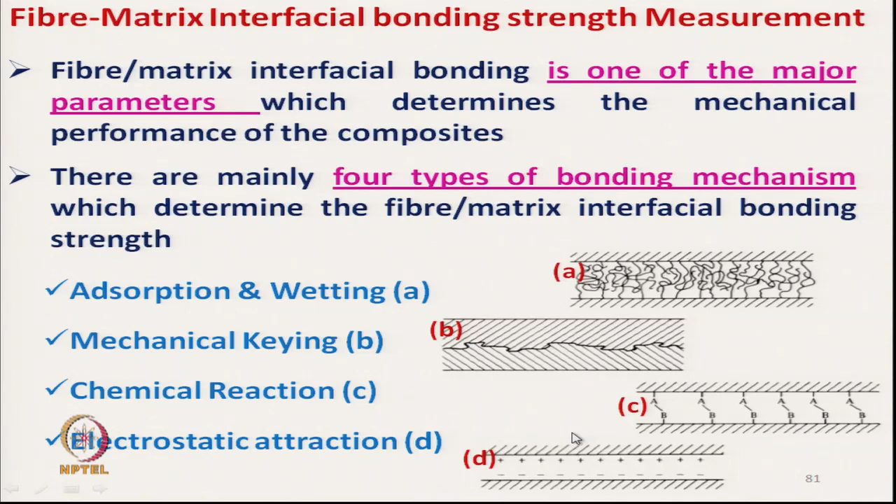Third one is the chemical reaction between the fiber and interface material, and interface and matrix material. Fourth one is electrostatic attraction. If we can create the electrostatic attraction between the reinforcing material and the matrix material, we can create the bonding strength.

The measurement of bond strength is done using 4 different techniques, particularly for fiber reinforced polymers. These are single fiber pull out test, single fiber push out test, fiber push down test, and full fragmentation test.

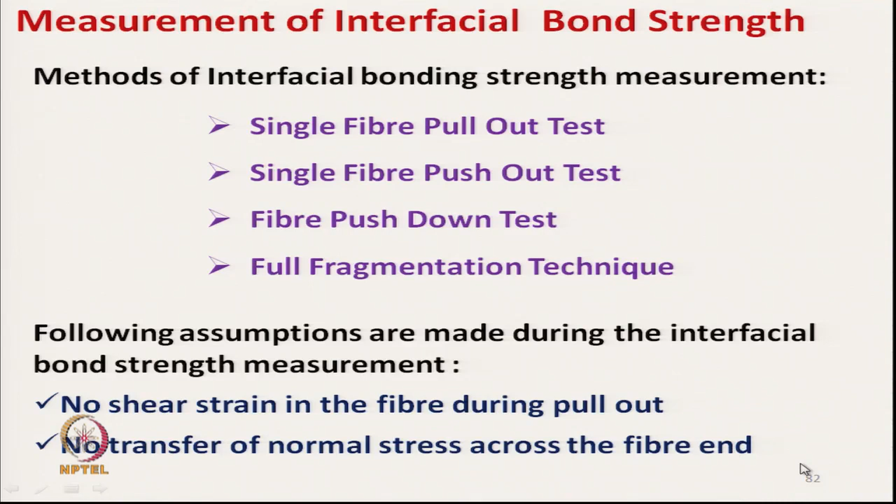The assumptions during the interface bond strength measurement are that there is no shear strain in the fiber during pull out. So once we try to pull out the fiber, there will not be any shear strain in the fiber, and no transfer of normal stress across the fiber end. With these assumptions we can test the bond strength.

The single fiber pull out test involves pulling a single fiber end which is partially embedded, a single reinforcing particle, out of the block of matrix material.

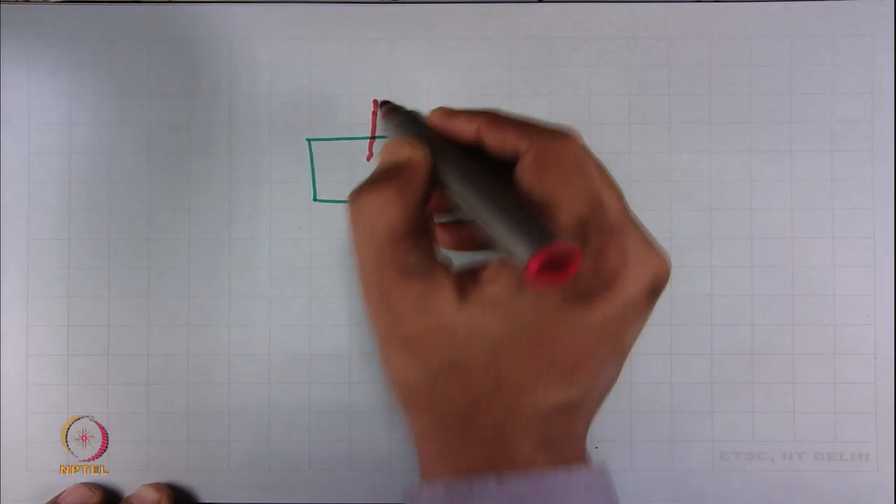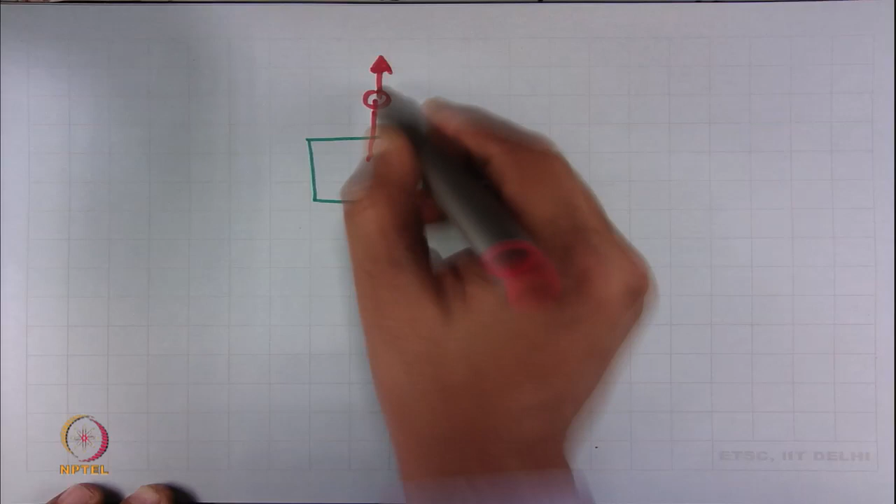So a matrix material block is created, and the single fiber which is partially coming out from the matrix. This is only a single fiber, and if we test, if we pull the fiber and once the fiber is coming out of this matrix from the composite material, this force is measured.

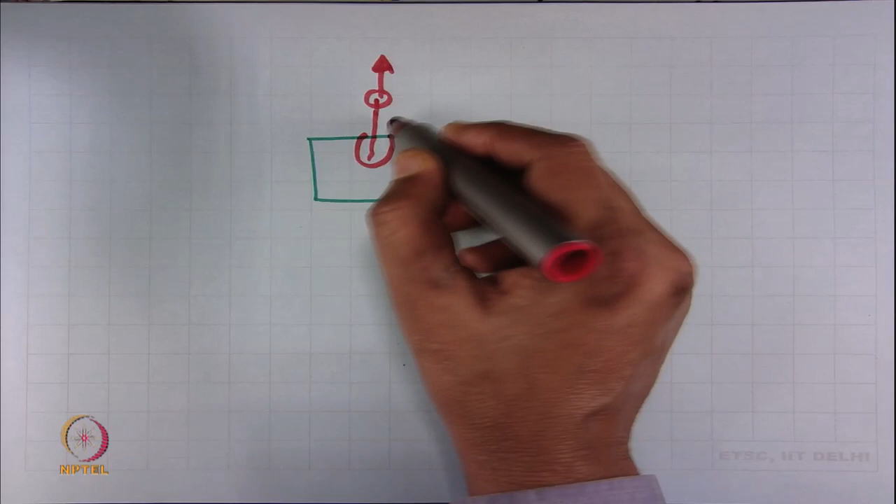That means if the fiber breaks before it comes out, then the test method will not complete. So partially embedded single reinforcing particles, like here the particle is fiber, out of the block of matrix material, this portion. Pull out leads to debonding.

First, debonding is taking place, then propagation of the debonding front will occur, then once debonding and propagation is completed, frictional sliding will be there. This test is applicable when the strength of the reinforcing material is very high, higher than the bonding strength.

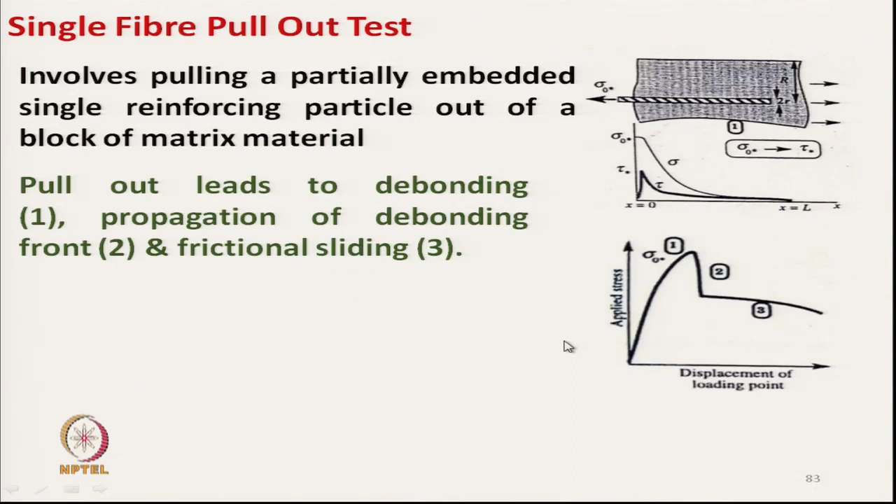The drawbacks are that the interfaces in the specimen may differ from those in real material, because here in the specimen, which is created using a single fiber, the interfaces created may be entirely different from the actual composite material, due to the absence of neighboring fibers. Here there are no neighboring fibers, but in composite material we have other fibers which interfere with the pulling out force.

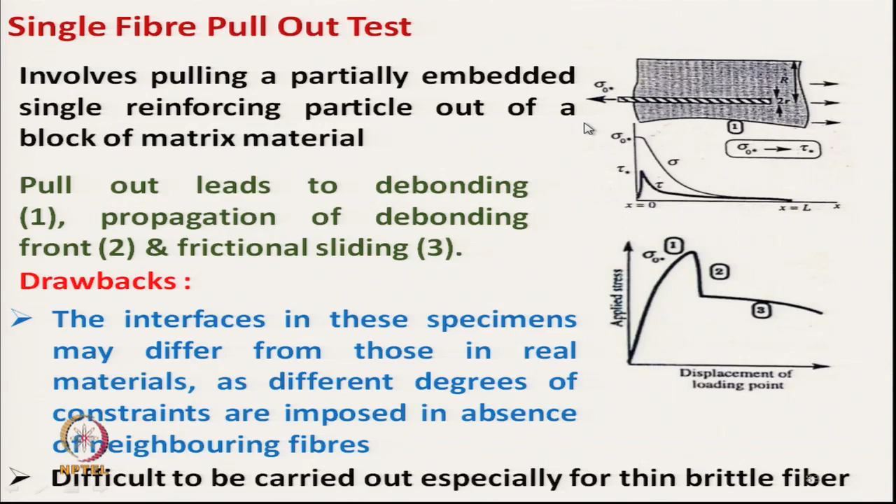It is also difficult to carry out, especially for thin and brittle fiber. For very thin fiber the strength will be less, so for those fibers it is very difficult to carry out, and also for brittle fiber the fiber may break before we start the test.

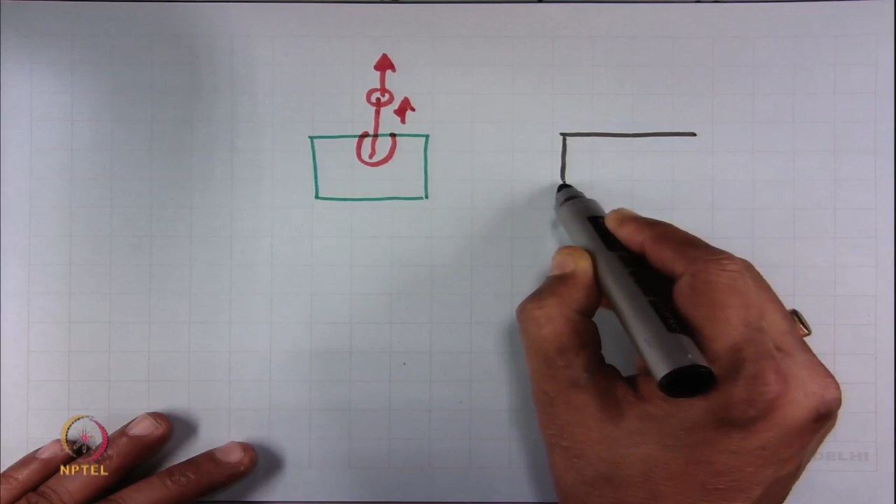Next method is single fiber push out test. Here the method is, this is a composite, and we use a single fiber here, and the fiber should be thick enough.

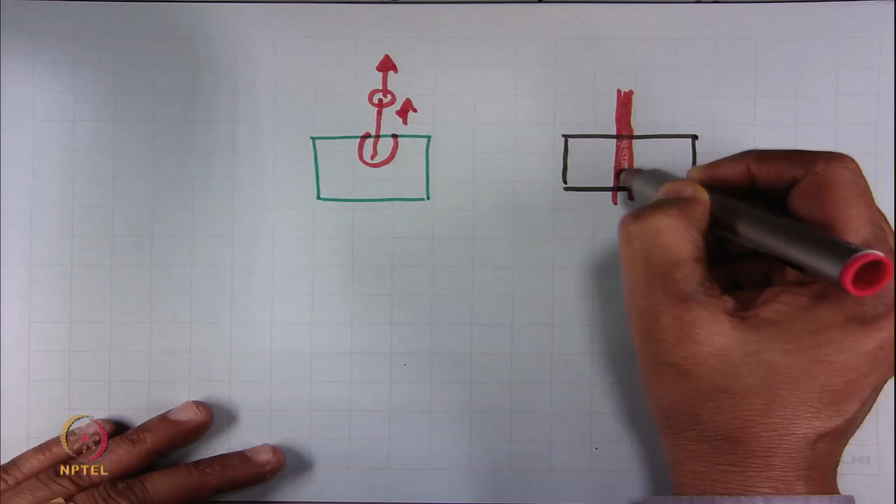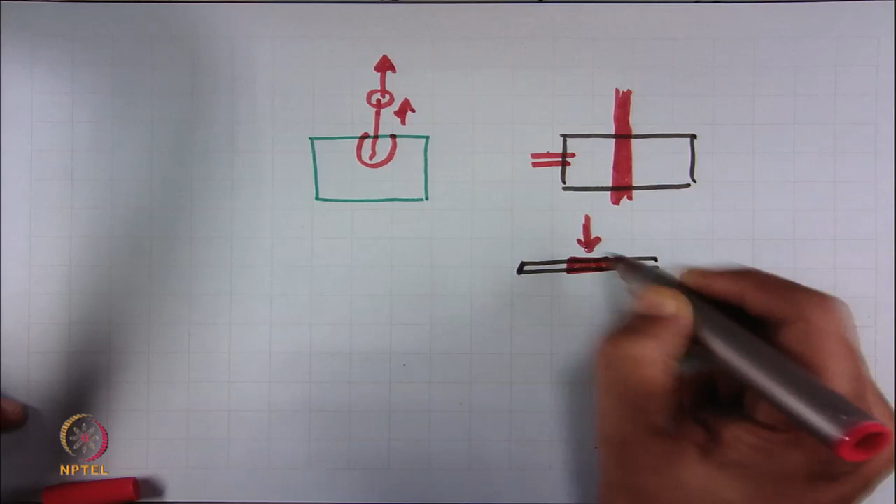After this, the composite slice is made. This is a composite slice, a very thin slice of composite, and here we have a single fiber. In this case, the single fiber is pushed out by applying some force, the fiber will be pushed out, and this force is being measured.

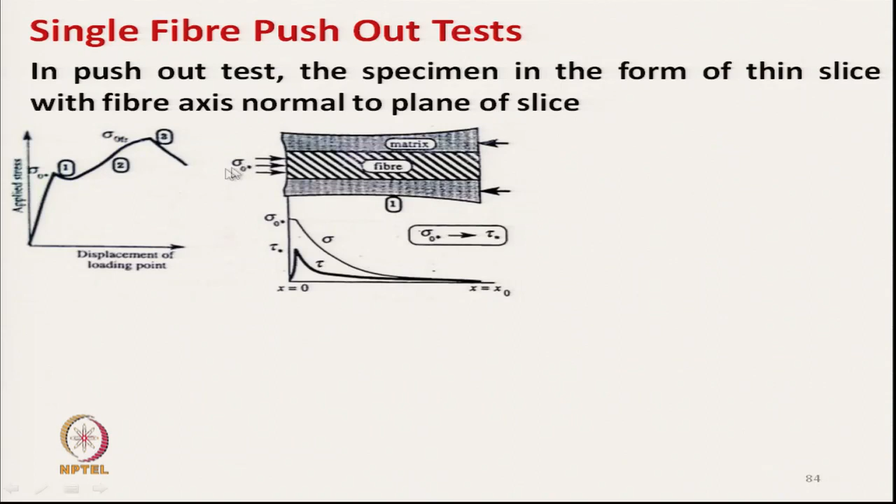That is, in the push out test, the specimen is in the form of a thin slice with the fiber axis normal to the plane of the slice. So this is the plane here, and this is a single fiber, and this is the slice thickness, and the fiber is being pushed out of this place.

The fiber becomes displaced, so that it protrudes from the bottom of the specimen, from the other side it will come out. This test is easy with large diameter fiber, but for fine fibers it is difficult. So the thickness of the fiber should be sufficient, otherwise it is very difficult to push out. This again shows debonding, propagation, and frictional slide.

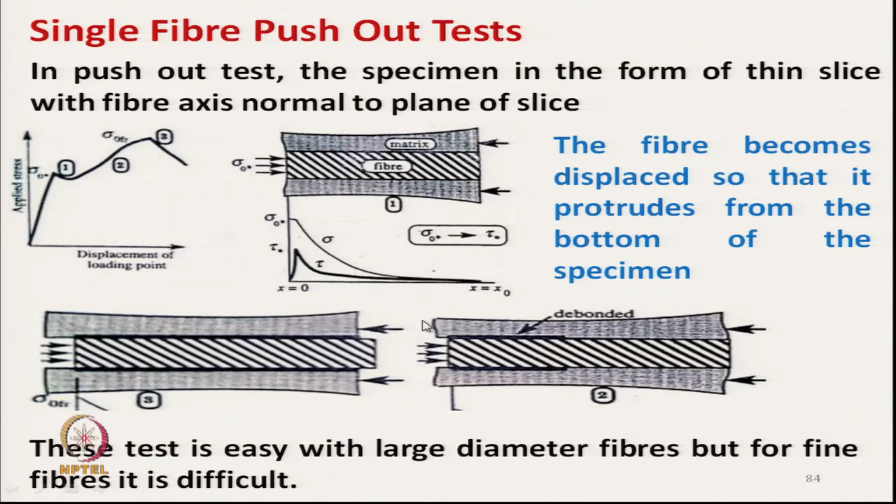Third method is the fiber push down test. Here it is not a single fiber, but a bulk fiber. In the push down test, the specimen is in bulk form, and debonding is followed by the fiber frictionally sliding down over a certain distance, from which we can calculate the debonding force. This leaves a permanent displacement between the top of the fiber and the top of the matrix when the applied load is removed, so there will be permanent deformation.

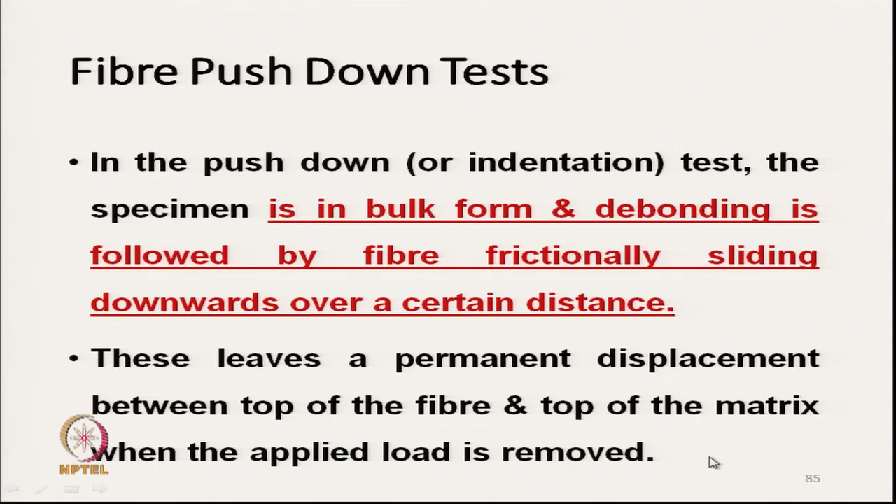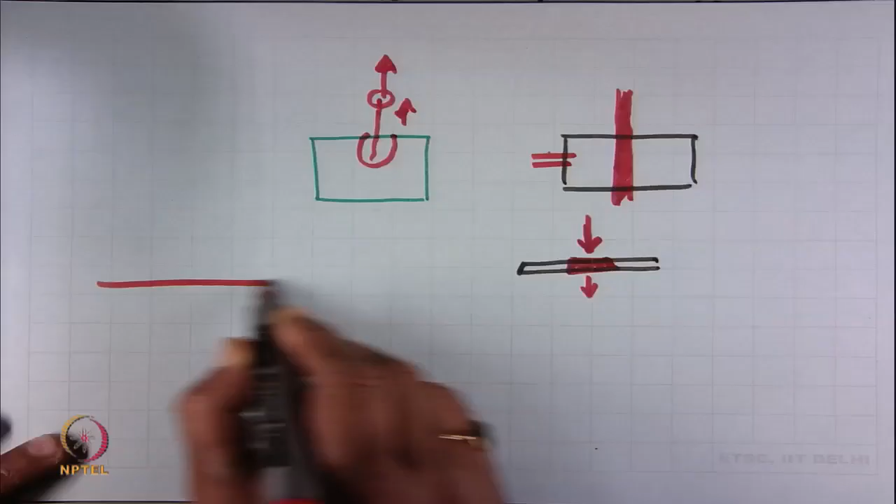The next technique is the fiber fragmentation technique. This method is used for metal matrix composites and some polymer matrix composites also. This method involves embedding a single fiber in matrix and straining the matrix in tension parallel to the fiber. Here we have the matrix, and here we have the fiber material.

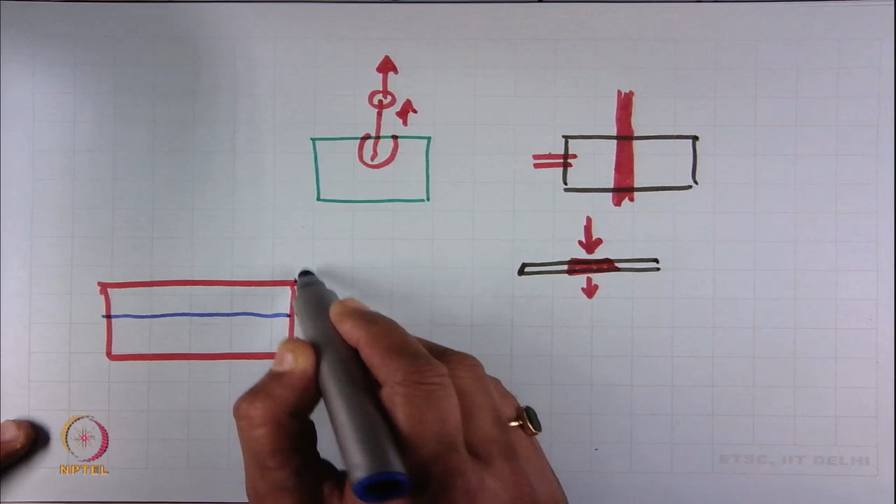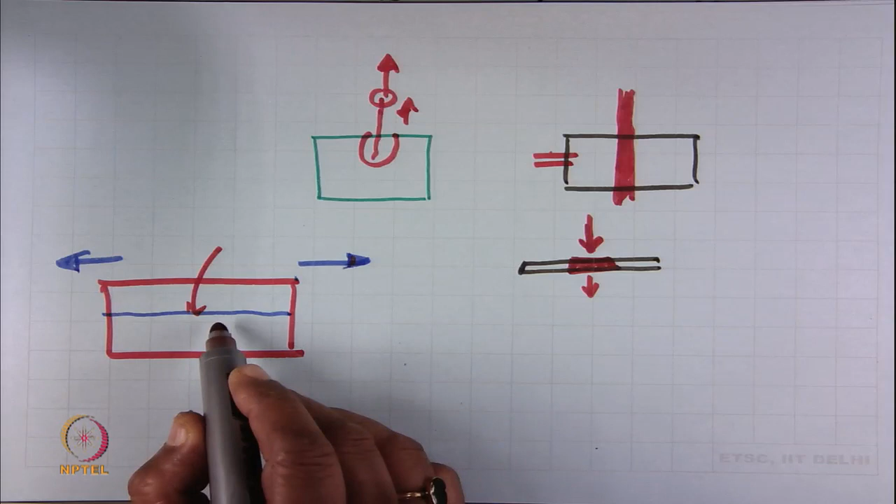Now this matrix is being strained, and in case the extensibility of the matrix is higher than the reinforcing material, there will be fragmentation of the reinforcing material. This matrix is being strained to this dimension, and the reinforcing material has got fragmented. By studying the fragmentation and the aspect ratio, we can calculate the debonding force.

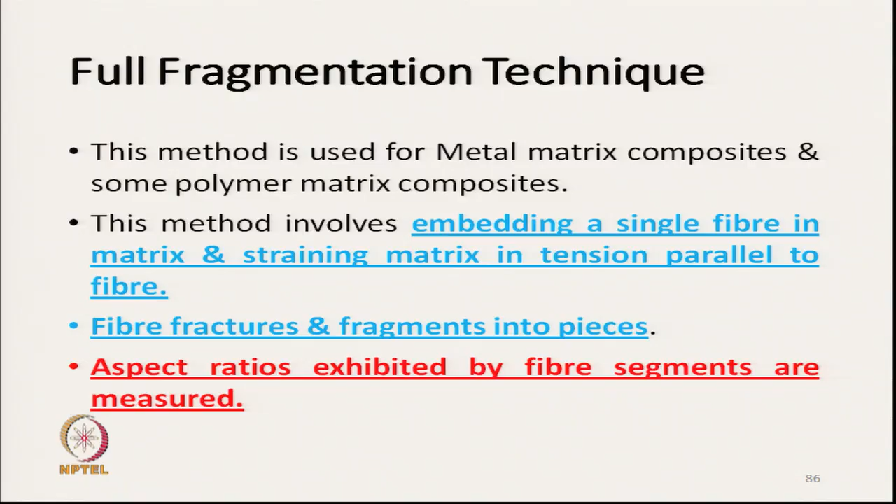So by applying the tension parallel to the fiber, it fractures and fragments into pieces at different points, and the aspect ratio exhibited by fiber segments is measured. So these are the methods for measurement of debonding force.

The next important characteristic of any composite material is void content, because the amount of void content in the composite material affects its mechanical characteristics significantly. Voids are entrapped air in the composite, it may be entrapped air or any volatile material. Presence of void can drastically reduce the mechanical properties of composite materials.

During composite manufacturing, voids are eliminated by a process of consolidation which involves application of heat and pressure. So the void content of a composite sample can be calculated using a formula involving theoretical density and experimental density, where sigma T is the theoretical density and sigma E is the experimental density. Using this formula, we calculate void content as sigma T minus sigma E, divided by sigma T.

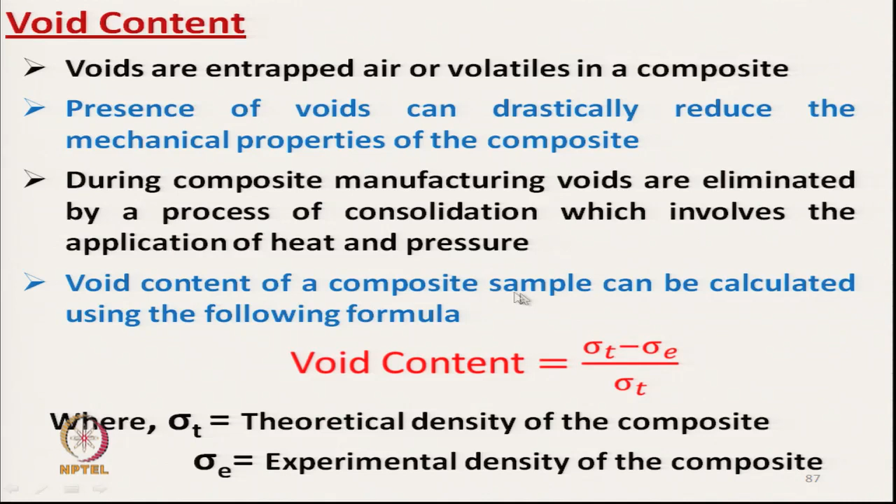The experimental density can be calculated by taking the mass of the composite in air and the same specimen in water. This method can be used only if the density of the composite is more than that of water, that is more than 1. If that is the case, then we can use this technique.

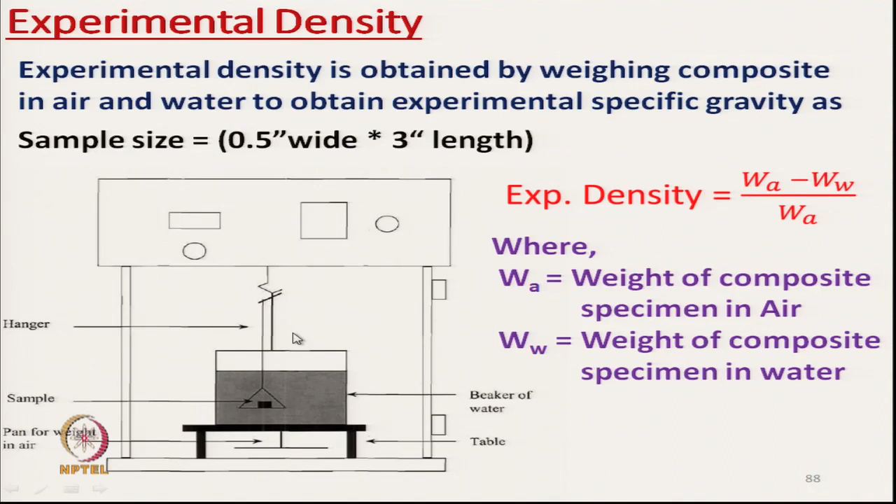The experimental density is given by W A minus W W by W A, where W A is the weight of the composite specimen in air and W W is the weight of the composite specimen in water. So here we measure the weight in water as well as in air, and the theoretical density we calculate by knowing the fiber volume fraction.

V f is the fiber volume fraction, sigma m is the density of the matrix, and this is the density of fiber. Using this formula we can calculate the theoretical density of the composite material, and the fiber volume fraction in the composite can be measured as follows.

We also have to measure the actual fiber volume fraction, V f. It is done by using image analysis technique, matrix burn off technique, or liquid digestion technique. So the matrix can be removed by using the burn off method or the liquid digestion method.

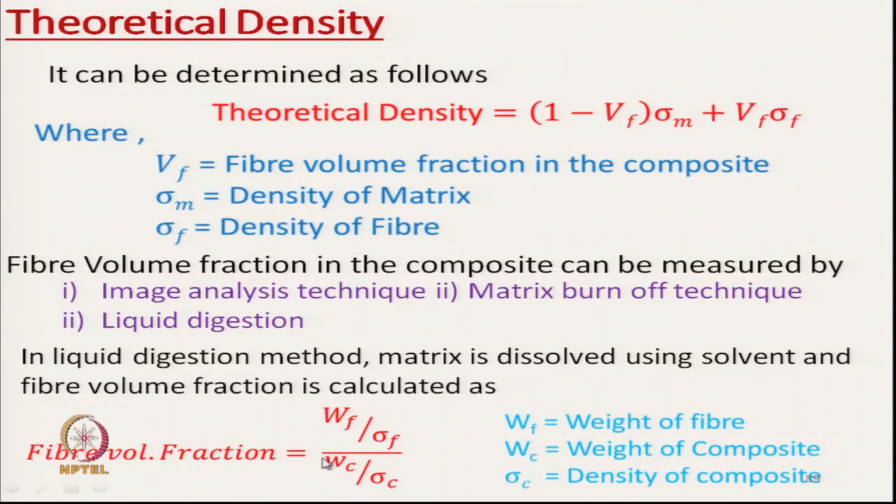So we can get the actual volume of fiber, and the fiber volume fraction is W f by sigma f, that is the mass of fiber divided by density of fiber, giving the volume of fiber, divided by the volume of the composite material. So it is the total volume of fibrous material divided by the total volume of composite material.

After measuring the void content, the next important characteristic is dynamic mechanical analysis. This is important for composites because during application they are subject to various dynamic mechanical loads at different temperatures and conditions. DMA is used to study the viscoelastic behavior and glass transition temperature of the polymer. Most fiber reinforced polymers are viscoelastic in nature, and this behavior is assessed using the DMA method. There are several types of DMA used with composites, including torsion pendulum analysis and other resonant techniques.

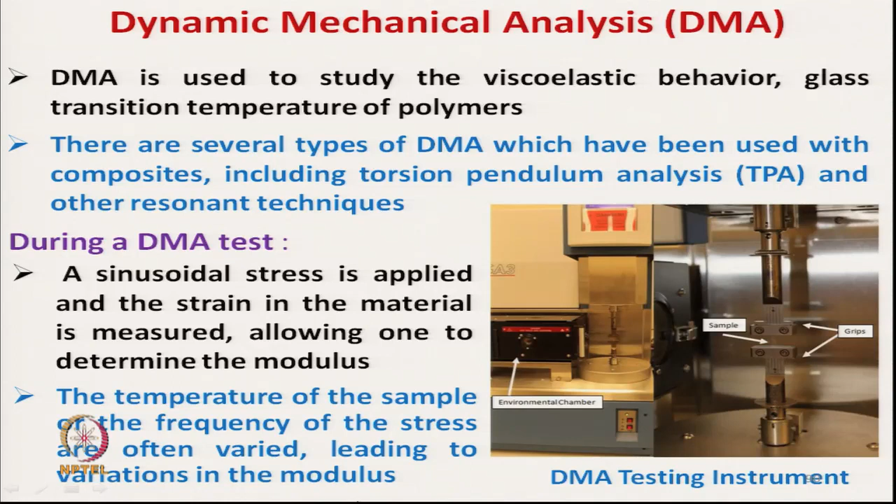During a dynamic mechanical analysis test, a sinusoidal stress is applied. Here is the grip, and in between the grip there will be a specimen. Sinusoidal stress is applied, and the strain in the material is measured, allowing one to determine the modulus. The temperature of the specimen or the frequency of the test is changed, leading to variation in modulus. So we change the temperature and frequency of stress and measure the change in modulus. The test is carried out for storage modulus and loss modulus.

DMA measures stiffness, which is the in-phase component, that is storage modulus. Stiffness is the elastic component, and damping is the viscous component. By this method we can measure stiffness and damping, and these are reported as modulus and tan delta.

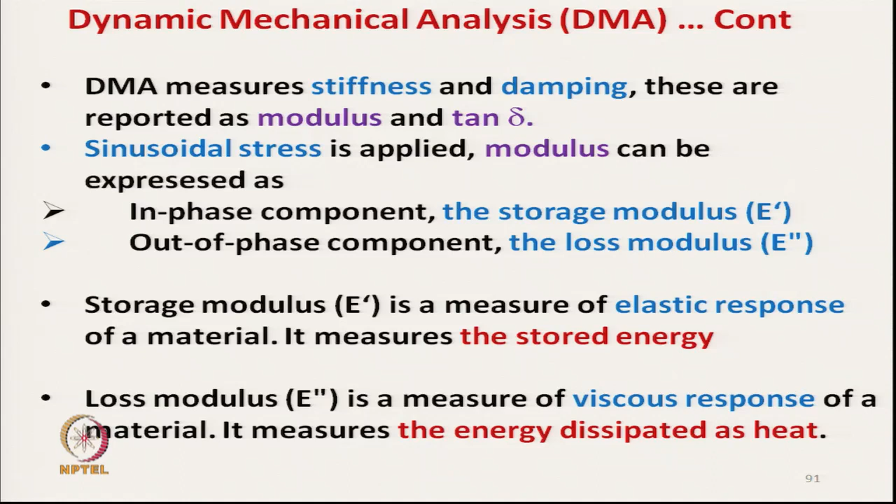The sinusoidal stress is applied, and modulus can be expressed in terms of the in-phase component, that is storage modulus E dash, and the out-of-phase component, which is loss modulus E double dash. The storage modulus is a measure of elastic response of the material, measuring the stored energy. The loss modulus measures the dissipated heat during testing, which is the viscous response of the material. Tan delta is the ratio of loss to storage, and is called the damping. So if we take the ratio of loss modulus and storage modulus, we get the damping value, a measure of energy dissipated by the material.

Tan delta can be used to characterize the modulus of the material, and it is expressed as E double dash by E dash, where E double dash is loss modulus and E dash is storage modulus. Delta should range between 0 to 90 degrees. As delta approaches 0, it approaches pure elastic behavior, where E double dash tends to 0, meaning this part becomes 0, so tan delta becomes 0.

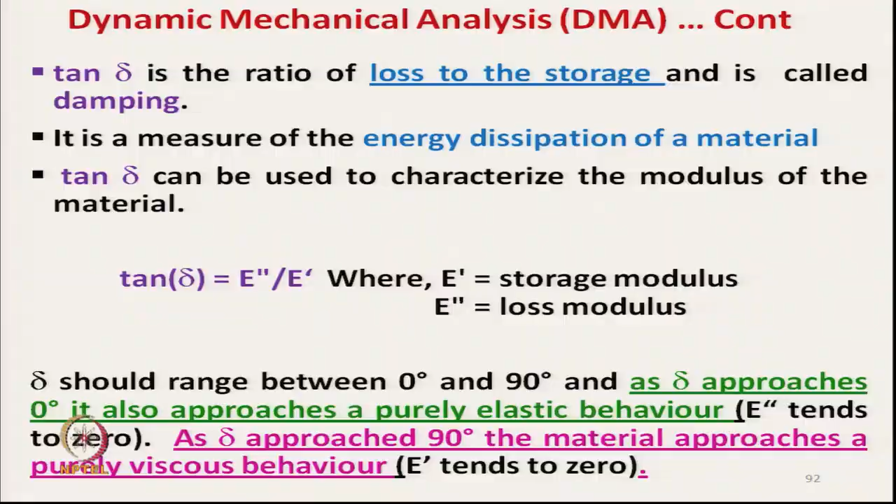That shows pure elastic behavior, and as delta approaches 90 degrees, it approaches pure viscous behavior. So from the tan delta value we can get an idea about the material behavior, whether it is a pure elastic material or a pure viscous material. For thermoplastic composites, if we increase the temperature, it will gradually transition from elastic behavior to viscous behavior.

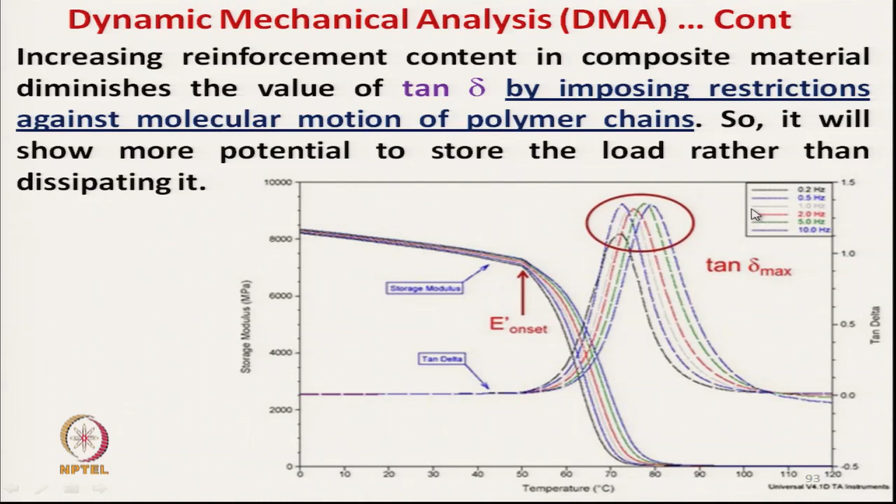By imposing the restriction, once we add the reinforcing material and increase its content, it restricts the molecular motion of the polymer chain, showing more potential to store the load rather than dissipating it. This allows the composite material to store the load.

Otherwise, in absence of reinforcing material, it will try to lose all this load value. Now, after all these tests which we have discussed, those are destructive in nature. That means we test the composite which will not be reused, but in most applications the composite materials are applied in structural material. If we want to use test methods which are destructive in nature, we cannot use them for any structural material.

But during the applications of all this composite in different structures, if we want to use it, we have to select some non-destructive test of composite materials. So there are different non-destructive methods which will actually help us to understand the characteristics of composite materials.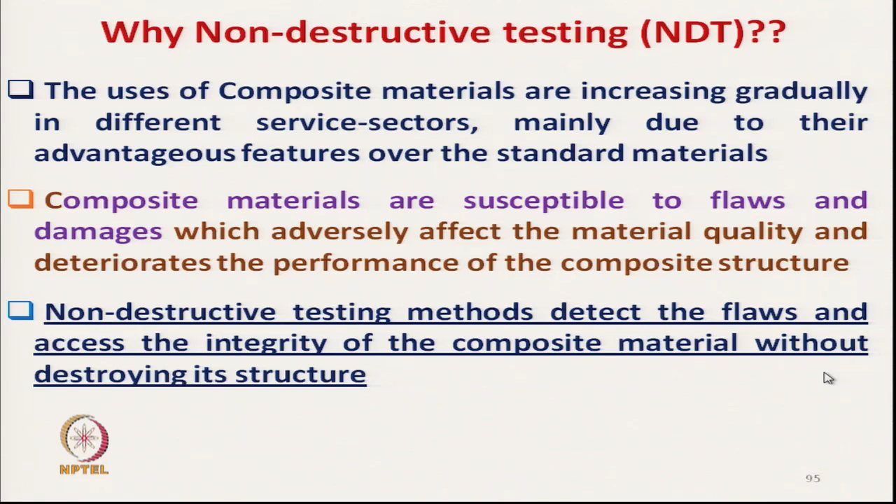Non-destructive testing methods detect the flaws and assess the integrity of the composite material without destroying the structure, which is extremely important. So we have to assess the integrity of the material or structure without destroying it. We can intermittently test the performance of the structure by non-destructive methods, and it minimizes the risk factors during service life of a composite material.

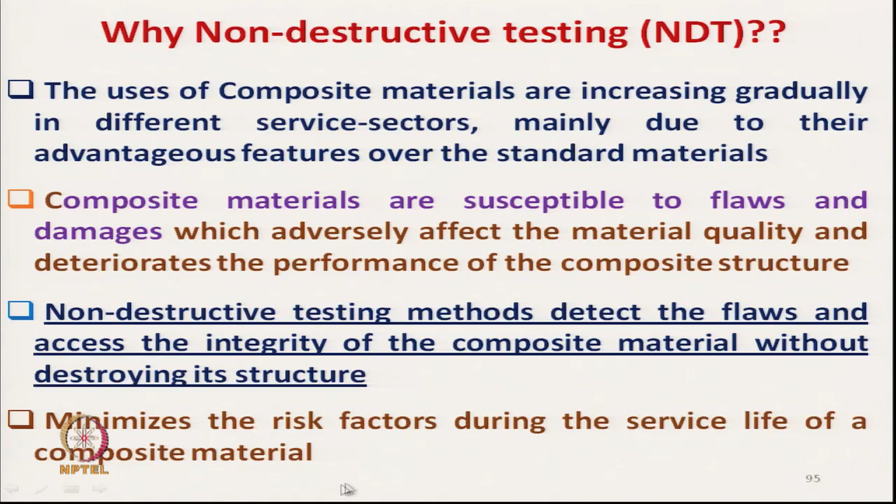So, during its service, like an aircraft structure or aircraft body, if we want to test whether there is any crack or any failure, we can use non-destructive test methods on the total structure. Here we cannot use the destructive test method.

So, the driving force is the safety norms. There are different safety norms. Suppose a particular structure, we have to understand whether any internal damage took place or not in the structure which is already built. There is a norm: we have to test and understand the characteristics of the material during test. So, due to the safety norms we have to test the material, but if it is destructive in nature we cannot test it. So, non-destructive testing is required.

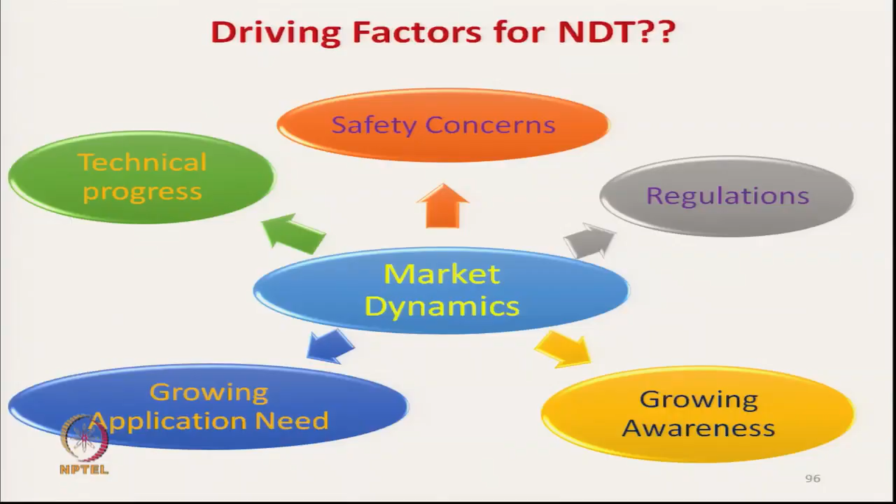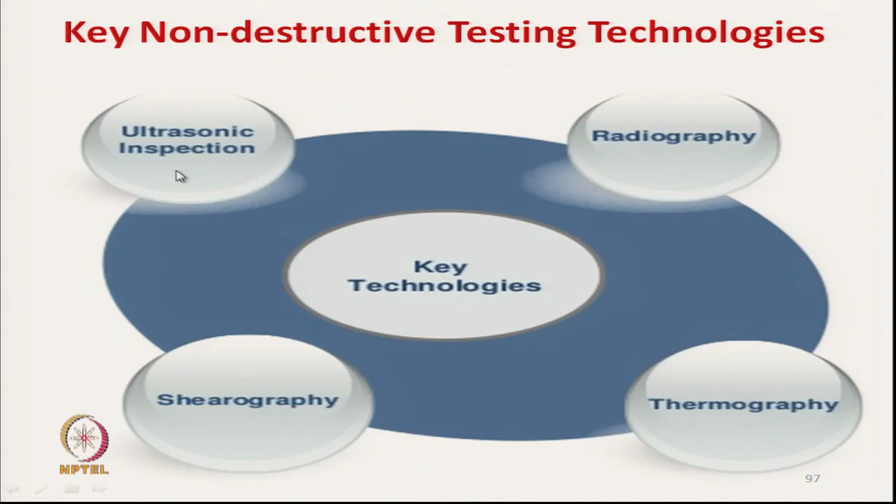Different test technologies are there. The main technologies are radiography, thermography, shearography, and ultrasonic inspection. In ultrasonic inspection, we use ultrasonic sound waves to assess the characteristics. I will discuss all these methods one by one.

First is ultrasonic inspection. This method works based on the propagation of ultrasonic waves, ranging from 0.1 to 50 megahertz, through the material tested. So the ultrasonic wave is propagated through the material. During testing, the sample is immersed in some liquid to separate the transducer and the test object.

The transducer generates the ultrasound, and the test specimen should be separated using some liquid applied on the surface of the test material. The transducer which generates the ultrasound is connected to a diagnostic machine and is passed over the object during the test.

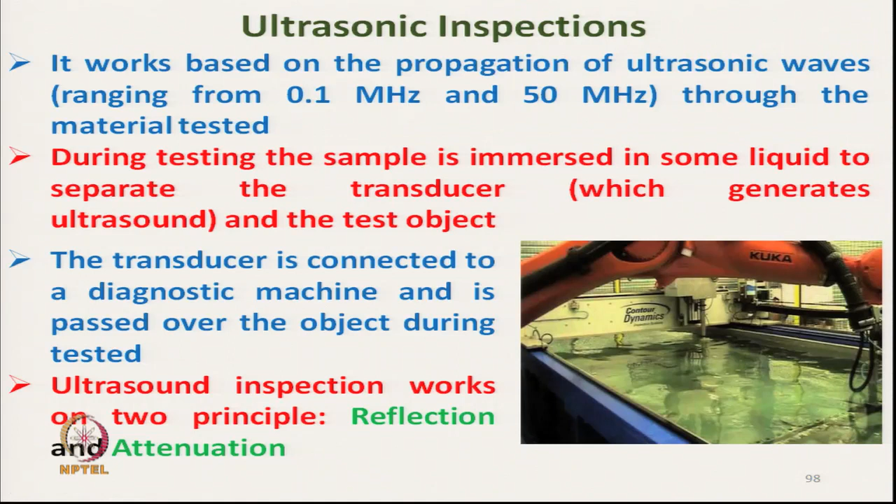The ultrasound inspection works on two principles: reflection mode and attenuation mode. In reflection mode, the ultrasound falls on the material, and due to the presence of some defects, it gets reflected, and that reflection is measured. In attenuation mode, the ultrasound is passed through the material, and the recording is taken from the other side.

Once it is working in reflection mode, the transducer performs both the sending and receiving of the ultrasound pulse wave. So there is the transducer - this sensor is sending the ultrasound and receiving the ultrasound, and the time here it is measuring the peaks.

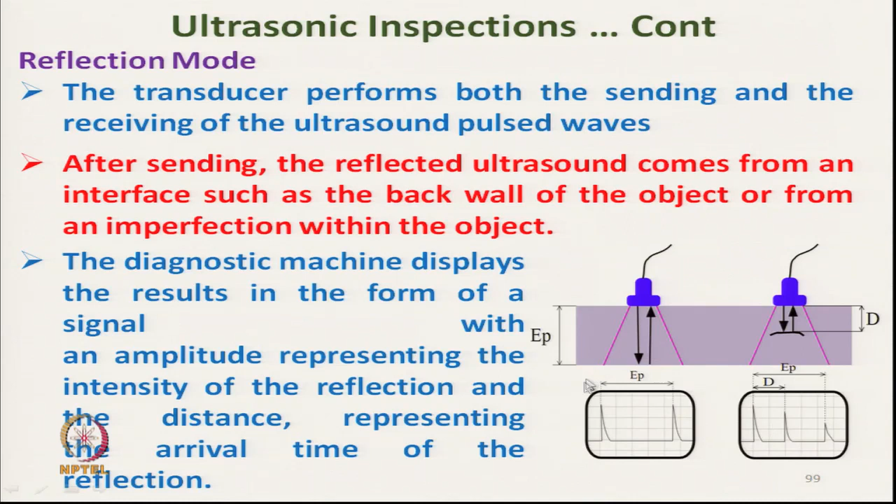Once the ultrasound system works on attenuation mode, a transmitter sends the ultrasound through one surface, and there will be a separate receiver which will detect the amount of wave that reaches the other surface. Depending on the defect present in the structure, the amount of wave transmitting through the composite will change. The imperfections reduce the amount of ultrasound transmitted, thus revealing their presence.

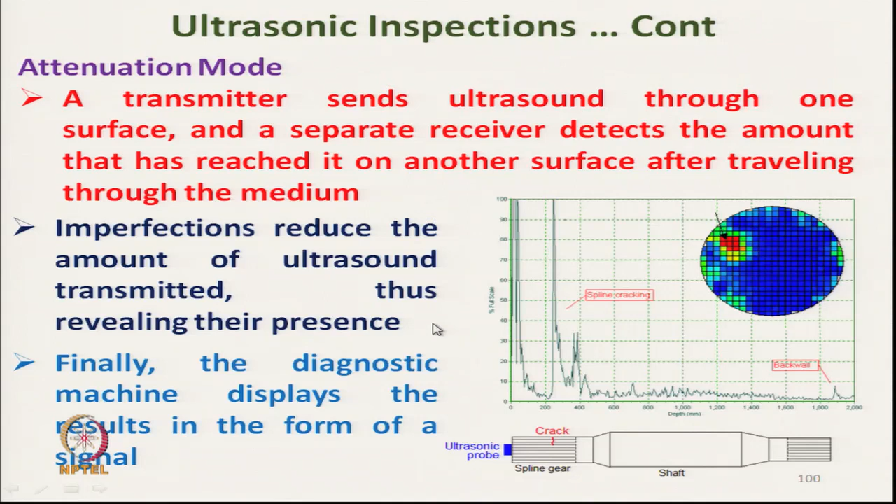So any defect present inside the structure can be identified. Finally, the diagnostic machine displays the results in the form of a signal. So it works on reflection mode and attenuation mode.

The advantages of ultrasound: the ultrasonic inspection principle is that it is capable of detecting very small flaws from deep within the sample. So in case there is a very small crack inside the composite material, it can detect it with greater accuracy than other non-destructive methods, and is capable of estimating the size, orientation, shape and nature of the defect. So for any sorts of defect, whether it is a void or crack or something else, it can detect it.

Non-hazardous, because only ultrasound is created, so it does not affect the human body, the operator, or nearby personnel, and has no effect on equipment and material in the vicinity.

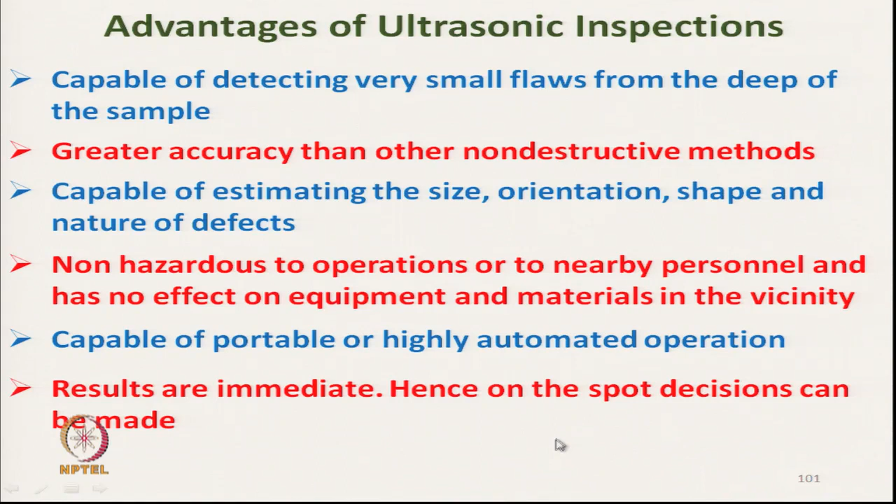Capable of portable or highly automated operation, so the total instrument can be taken to the structure and tested. Results are immediate, we can get the result immediately, hence on-the-spot decisions can be taken.

Main disadvantages of ultrasonic inspection are: it is expensive, and extensive technical knowledge is required for development of the inspection process, so it becomes expensive. Thin, rough, irregular shaped samples are difficult to inspect. This is because we need some liquid applied on the surface, and if the surface is rough, application of the liquid becomes difficult.

Surface must be prepared by cleaning and removing loose scales and paints. So once we try to apply this technique on an existing big structure where it is painted or something is on the surface, it is very difficult to use.

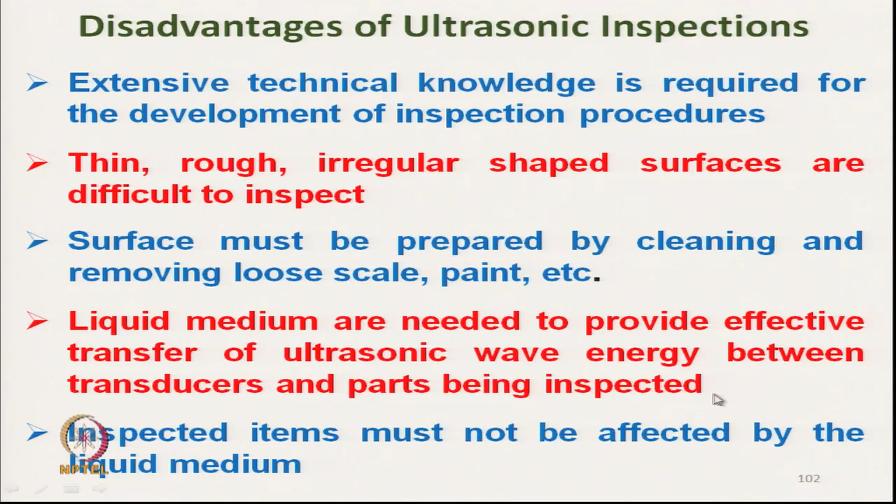Liquid medium is needed to provide effective transfer of ultrasonic wave energy between the transducer and the parts being inspected, and that is a disadvantage. It is very difficult to apply the liquid medium in some applications, such as when vertically oriented or curved, where it becomes difficult.

Inspected items must not be affected by the liquid medium. So the liquid medium we use should not get affected, and it should not affect the item, the composite material. This liquid should not react with the matrix or the reinforcing material.

Next technique is thermographic inspection technique. In this technique, the thermographic inspection of an object works through imaging of the thermal pattern at the object's surface, so from the other surface of the material we can get the thermal image.

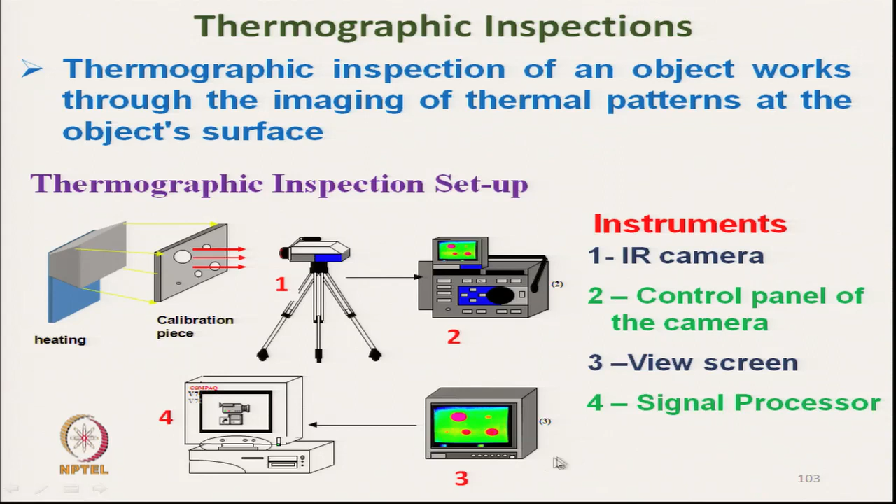So here it consists of an IR camera which takes the image, control panel of the camera, the control panel where we can control the camera, view screen, and signal processor. These are the components. The defects encountered here are lack of adhesion, cohesion, or bubbles.

So this type of defect, bubble present or lack of adhesion, we can measure using thermographic inspection. Delamination we can measure, defects on surface coating,

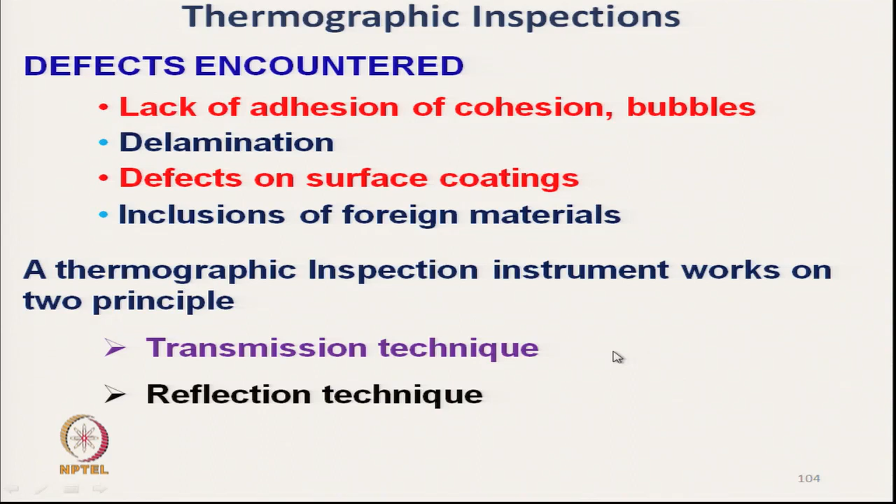inclusion of foreign material in the composite material we can get by using thermographic inspection. A thermographic inspection instrument works on two principles: one is transmission technique, another is reflection technique.

This is the technique for transmission mode, where heat is applied, and once the heat is applied, it will be transmitted evenly throughout the sample. The sample on the left side shows the sample without any defect. Once heat is applied from the heat source to the sample with defect, here due to the presence of a defect like a crack or any other thing,

the heat transmitted on the other side will be non-uniform, and by using the thermal imaging camera we can image the temperature distribution on the other side. This is showing the image on the other side, and this shows the defect present in the composite.

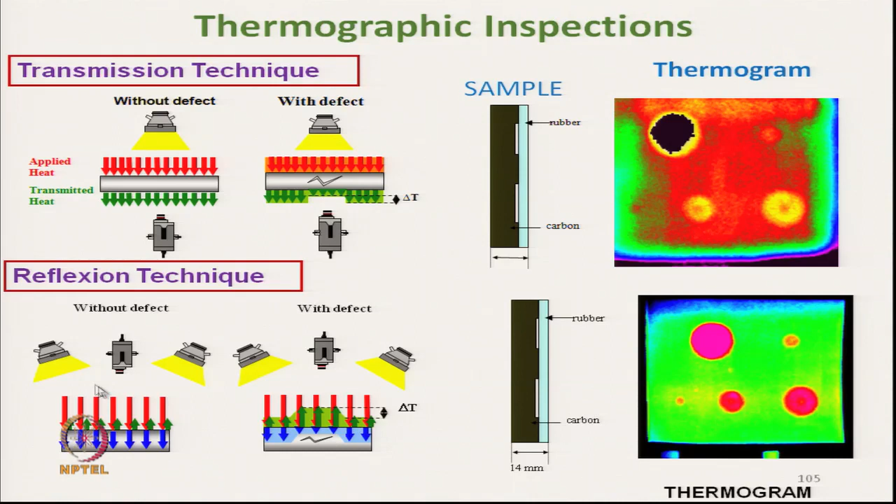Once this method works in the reflection mode, here the heat source and the camera are in the same direction. On the left side it is showing the specimen without any defect, that means the reflection of heat is uniform.

But on the other hand, with defect, as there is a defect present here, the heat reflected will be totally different in the defective zone than in the normal zone.

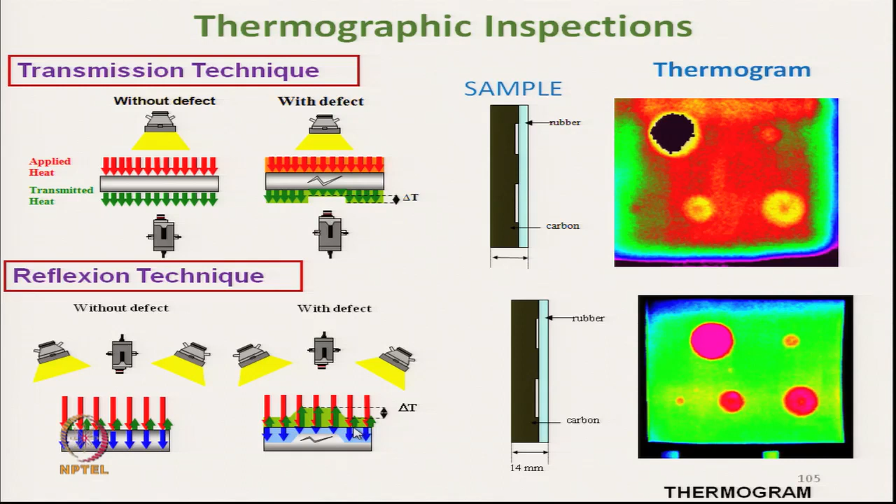So in case of transmission mode, the heat transmitted in the defective zone will be less than in the normal zone. But on the other hand, in case of reflection mode, the heat reflected in the defective zone is more than in the normal zone.

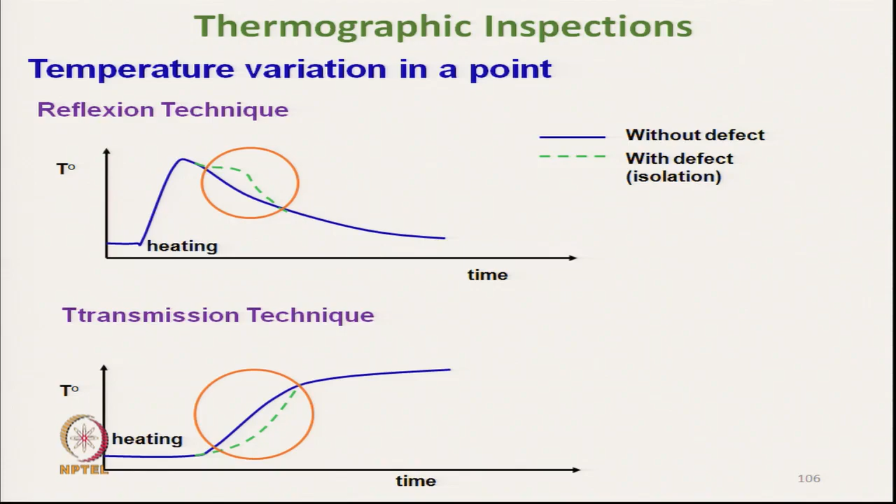This is shown by these graphs, here it is time and here it is temperature. In case of reflection mode, the temperature at the defective zone is higher than the normal portion, whereas in case of transmission mode this is lower, the temperature in the defective zone is lower. So by analyzing these graphs and pictures, we can get an idea about the defects present inside the composite structure.

So the advantages of this method are that it is a global examination of parts, only one side access is required for the examination, that is the heat is applied from one side, and if the reflection mode is used, only one side access is enough.

Real time inspection, applies to all composite structures and materials. So we do not need to apply any liquid medium here, and it is well suited for large surfaces. For large surfaces we can use this technique,

but the main disadvantage of this technique is that it is sensitive to heating mode. So if we change the mode of heating, that is type of heating, duration of heating, or position of heating, the result will change.

Suppose we change the distance of the heat source from the composite material, the heat transmitted on the other side or heat reflected will be entirely different. The response time must be studied, and exact composition of the piece and thickness must be known, because if it is a thermoplastic composite

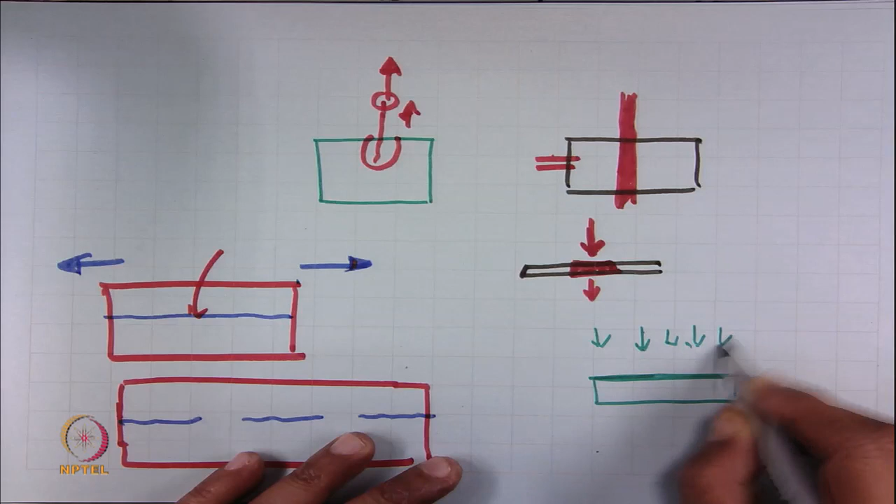Let us see, suppose this is a composite which is straight and uniform. So once it is heated, the heating will be uniform throughout the surface and the heat transmission will be uniform, suppose there is no defect.

Another composite, say of complex structure, this is the composite material without any defect. Now if we apply heat here, the heat transmission will not be uniform, which makes it very difficult to assess whether

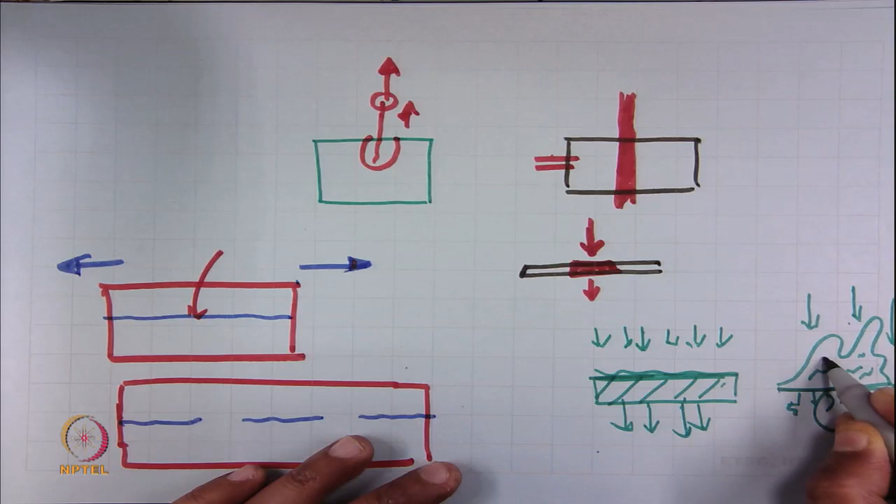this difference in temperature on the other side is due to the structure or the presence of a defect inside the structure. So that is why it is very difficult to assess the composite defect for inhomogeneous complex material.

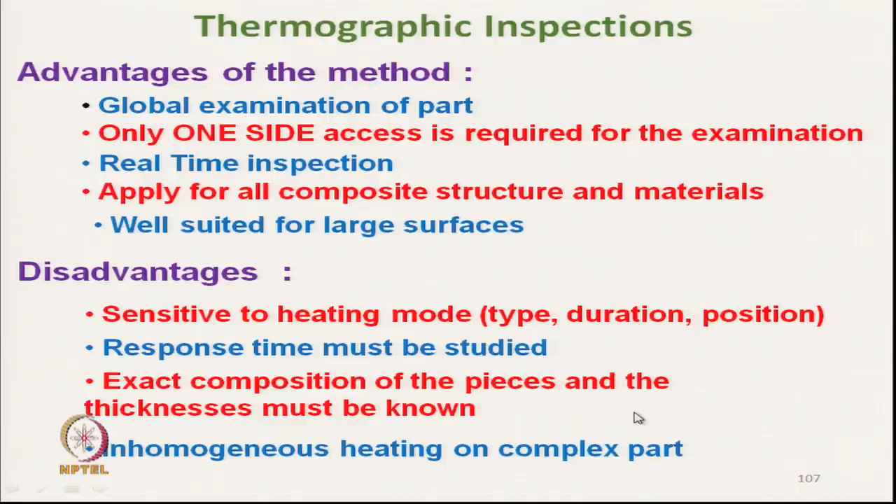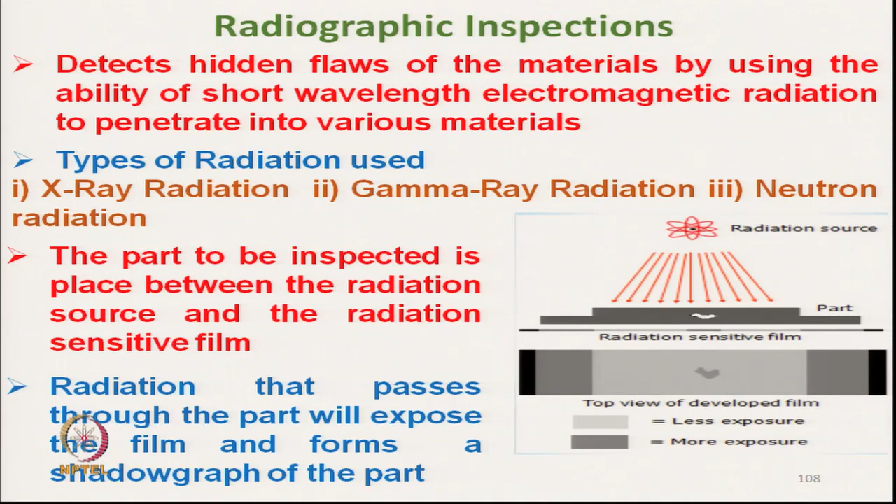So there will be inhomogeneous heating on the complex part of the composite, and the next technique is the radiographic inspection technique, which we will discuss in the next class. So till then, thank you for your patient hearing.